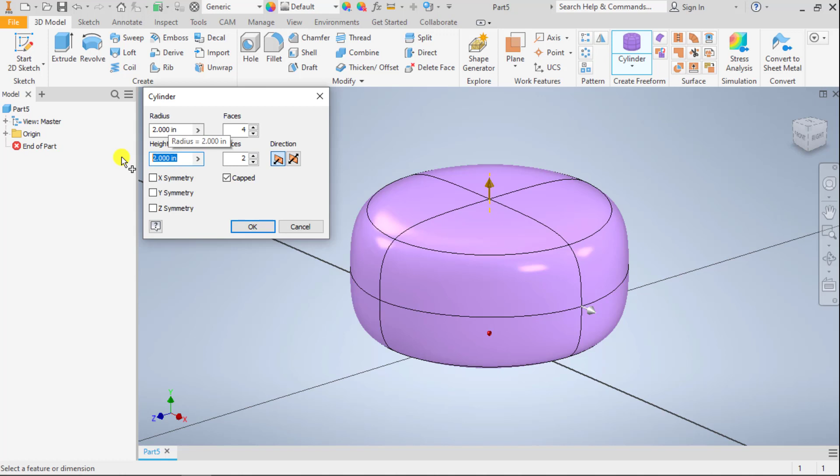Welcome back. In this tutorial we are going to cover the cylinder freeform, and we have an option here for capped. So this is pretty interesting. So let's go ahead and let's place a cylinder. Let's change our height to 6, and we can see that when the capped option is selected we have a cylindrical-ish kind of a body. It's rounded off, but we have a top and a bottom.

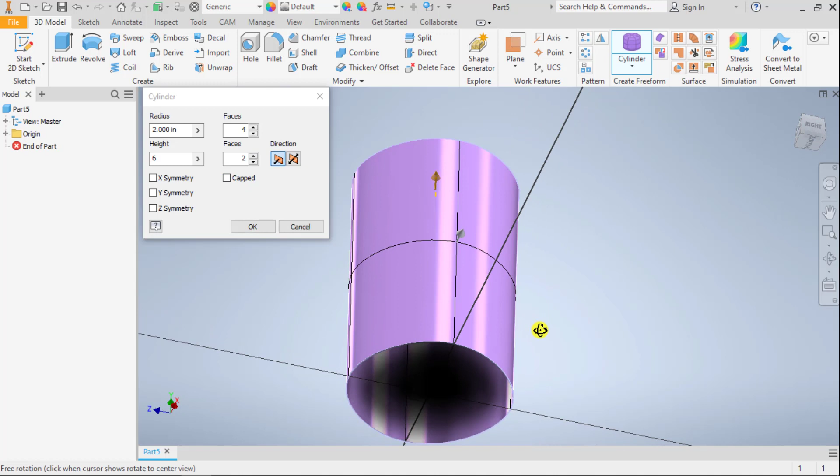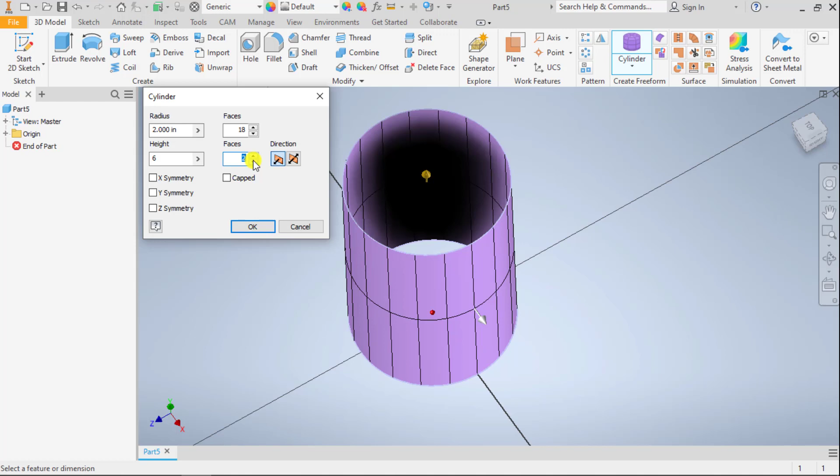When we uncheck capped, we see that we go to a straight cylinder. So if your design calls for a straight cylinder, you can add that. So right now, faces, there's 4 about the radius, so we can change that to, let's say, 18. And let's make this over our height. Let's do 12. So we've got a whole lot of points here.

And then if we leave capped on, by the way, and we come and hit OK, and then finish our form, our solid is going to have these kind of spider web looking triangular wedges in here, for lack of a proper geometric term. But we can delete those faces, but it's going to delete them as they're drawn here with shaded with edges turned on in my visual style.

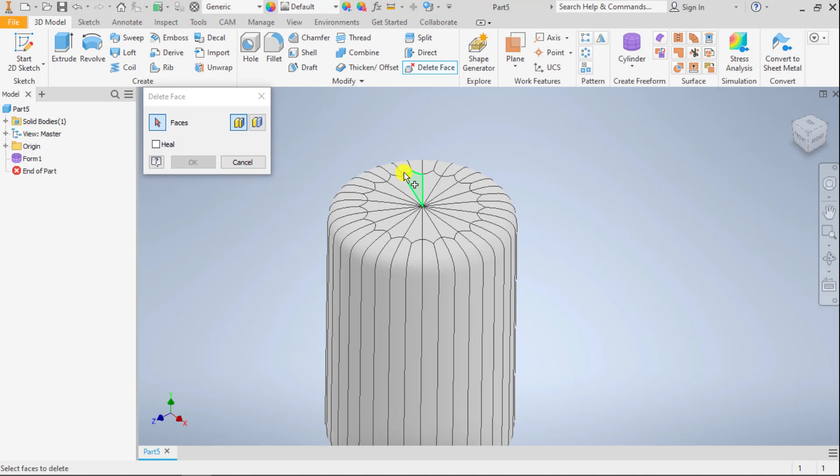And so something to think about that is going to drive how you do this, and that is if you need this to be hollow or not. You could always shell it and then make a cut. So if we went in here, made a shell, let's call that, I don't know, 20 thousandths, and then we hit OK.

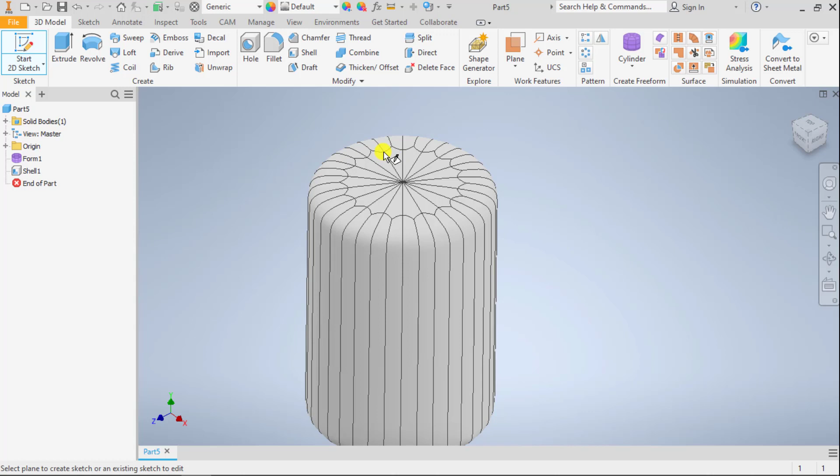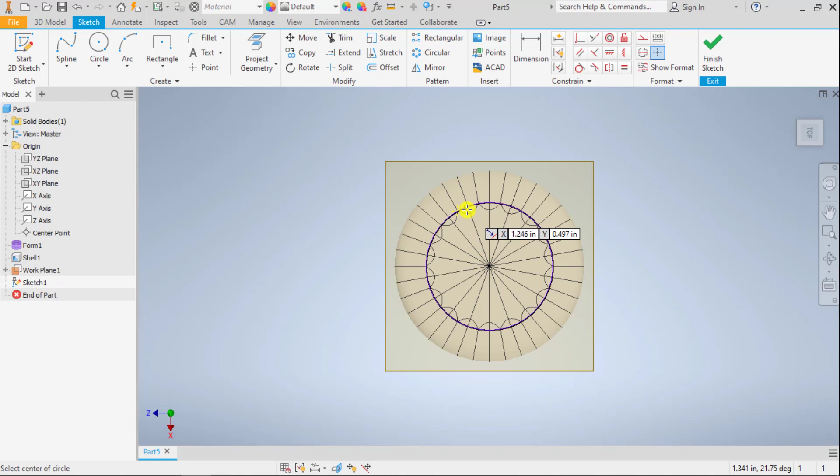Now we have a shelled out solid that we can now sketch on the top, which is not planar. So we'll make a plane off of our XZ, and then we're going to go 6. And then we can sketch on that. We can project any of this geometry. So let's say we want a circle that has a center point here and the radius there. And now we can finish this and then extrude that as a cut.

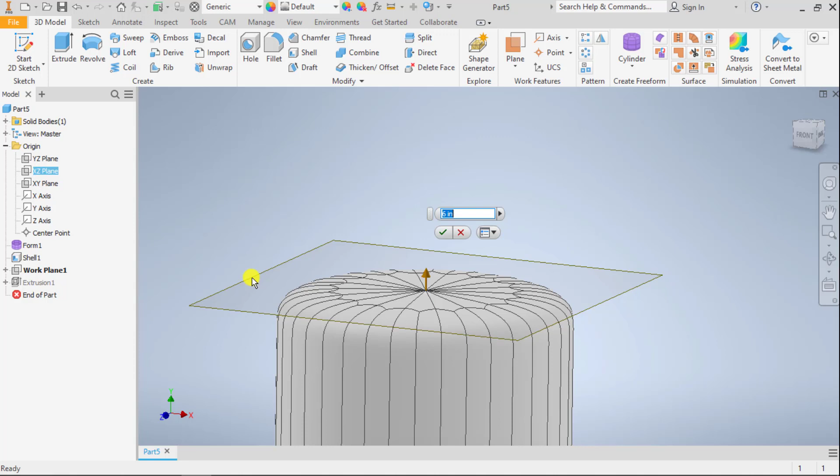And then we can see inside of our shelled object. So that's one. Well, that's interesting. So this actually has a little bit of a crown to it. So my work plane here would need to be set to, say, like 6.1. And then that should get rid of that. All right, cool. So a little unplanned impromptu problem solving.

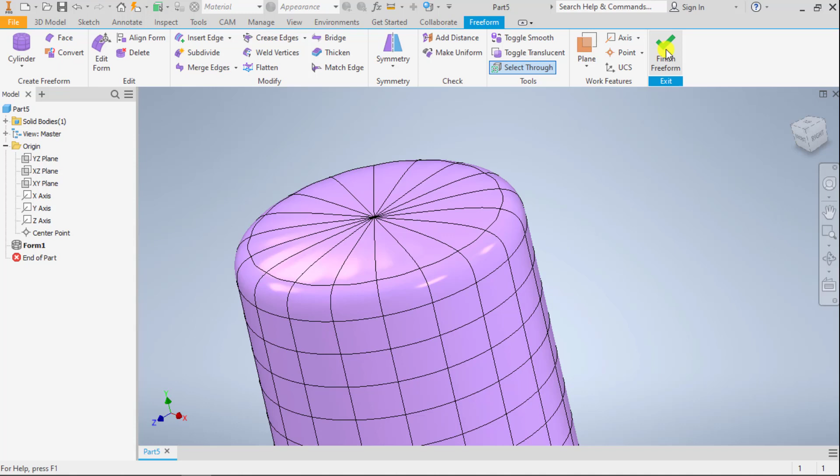So if that's not what we want, I'm curious to see, because I've not actually tried this yet, what happens if we go to edit this form. So we cannot change this to remove the faces up here. So if we wanted to have this uncapped, we would have to go back and redo it. So let's go ahead and put this in uncapped, 6, 18, 2, and 12.

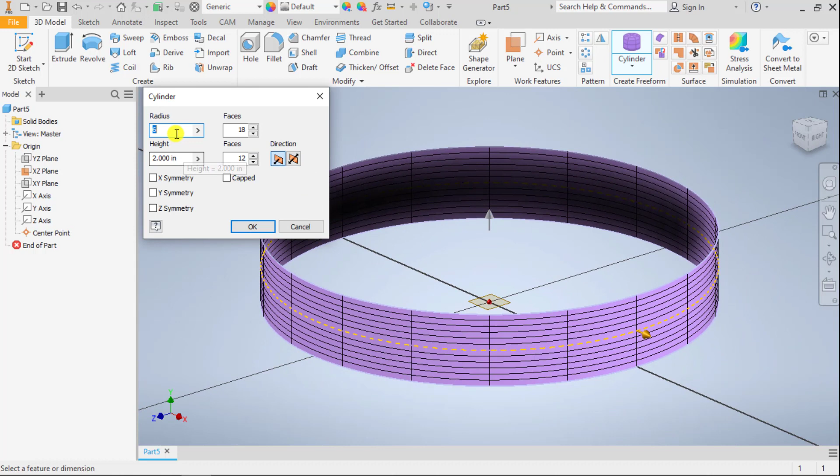Here's our plane. Here's our center point. You can also make it symmetric. That should be 2. That should be 6. There we go. You can also have this direction be symmetric if that needs to be part of your design. And now you've got in effect a surface that we can

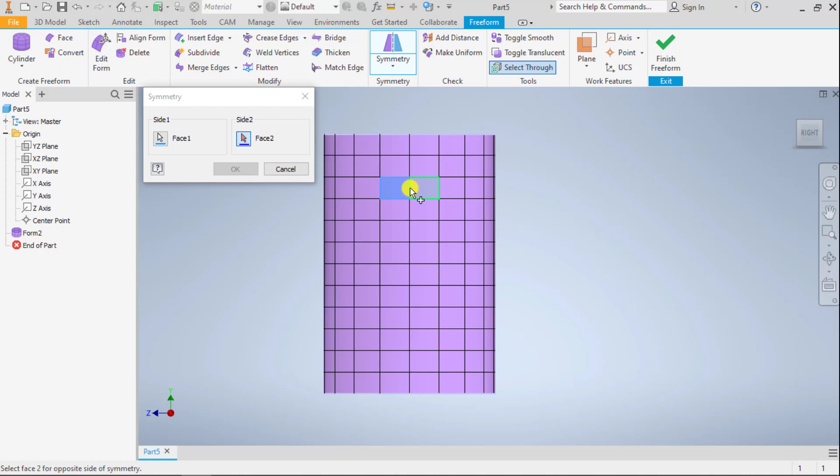modify. So here again, we can add symmetric constraints between our faces, and then we can do the same thing between the corresponding faces over here if we have a part that needs symmetry, and then we can grab this face here, we can drag, we can do whatever we want to it. We can add any of our directions.

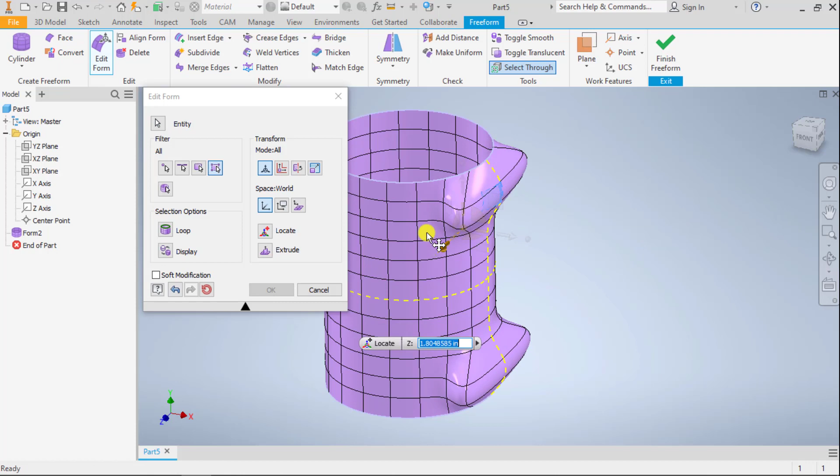So we could add that, let's say, and then hit finish, and then we're left with a surface that we can then thicken, and that's a solid, right? So a lot of different things we can do with cylinders. That's just a brief overview.

So go ahead and again play with this, and do some hands-on learning with experience, reminding you that you can undo and save frequently.